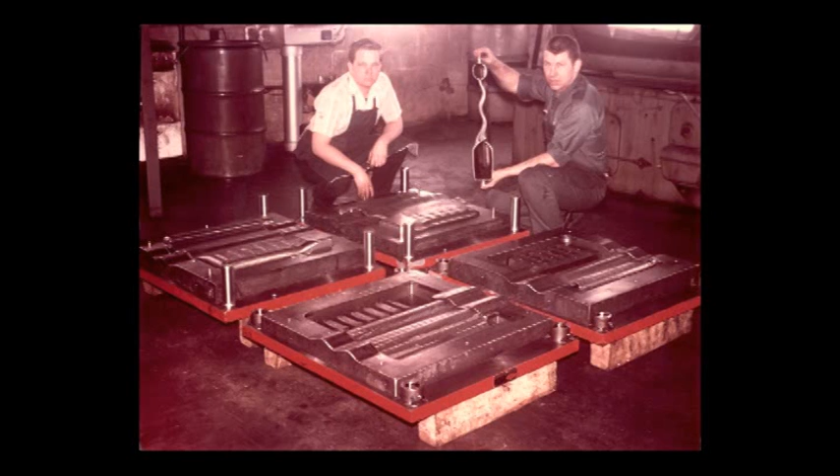The company began by serving area farmers with their machining needs and within 2 years had moved into building tools and dies for manufacturers of heaters, washers and dryers, and commercial staplers. The development of a motor grip feed would lay the foundation for today's product.

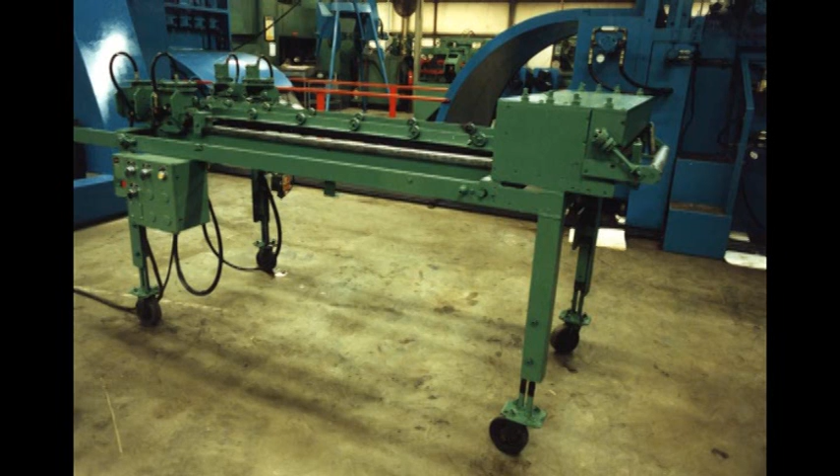In 1964, the company moved to a manufacturing space in the town of Red Bud. However, the company quickly outgrew that location, and plans were made to construct a new home for the company on the outskirts of town. In 1971, Red Bud Industries moved to its current location, at that time a 25,000 square foot facility. Around the same time, the Red Bud product offering expanded to machines for cut-to-length coil processing lines.

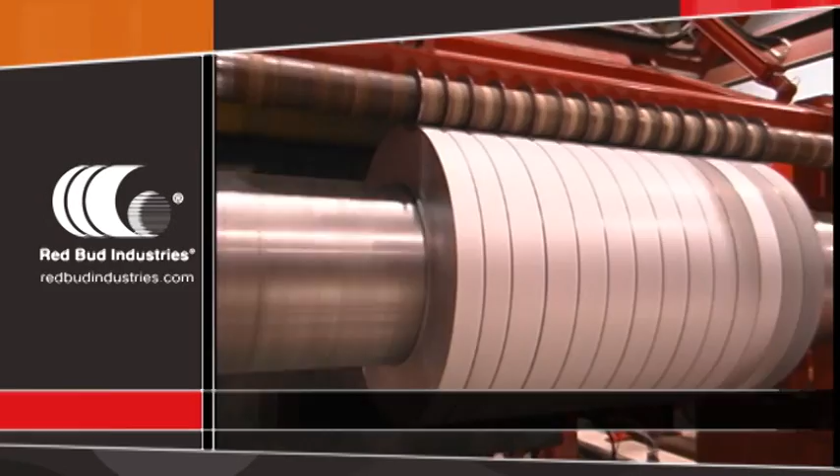The late 1980s and 1990s were a period marked by continual updates and improvements to the Red Bud product offering. The progress of design, research, and engineering continued into the new millennium. In 2000, Red Bud Industries designed and installed its first coil-to-coil slitting line.

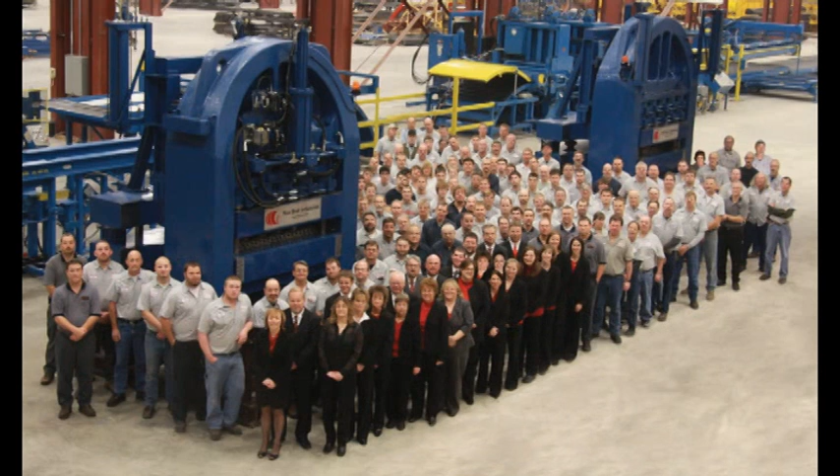The original 25,000 square foot building has been expanded 3 times since 1971 to meet the ever-growing number of orders. The building doubled in size in 1986 and again in 2000. The 2000 expansion was an office which hosts customers from around the globe. In the summer of 2008, the manufacturing facility was doubled once again to its current size of 200,000 square feet.

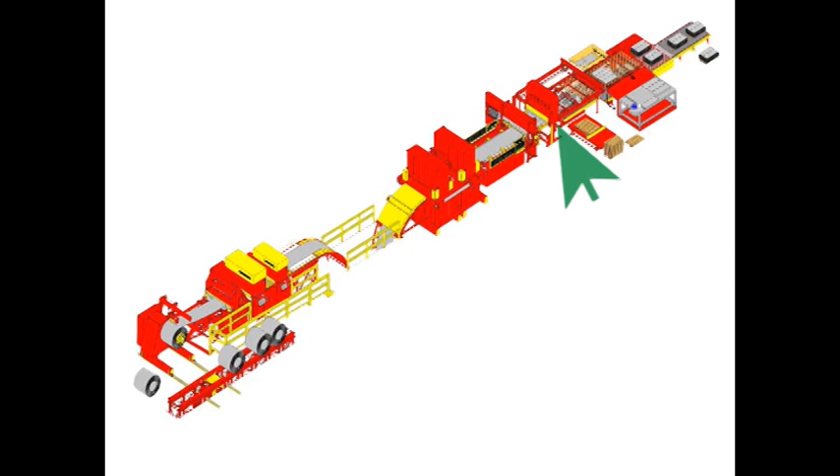The length of material is now fed through a shear and into a stacking device. The machine stops momentarily and the part is cut to the length that was set on the feed system. Here are the 4 panels cut to a given length and width. This particular installation has reject capabilities so that metal can be directed to a scrap bin or computerized measuring table without the operator ever touching the material. These lines measure up to 90 feet long, are 30 to 40 feet wide, and depending on the options, can cost the customer over $7 million.

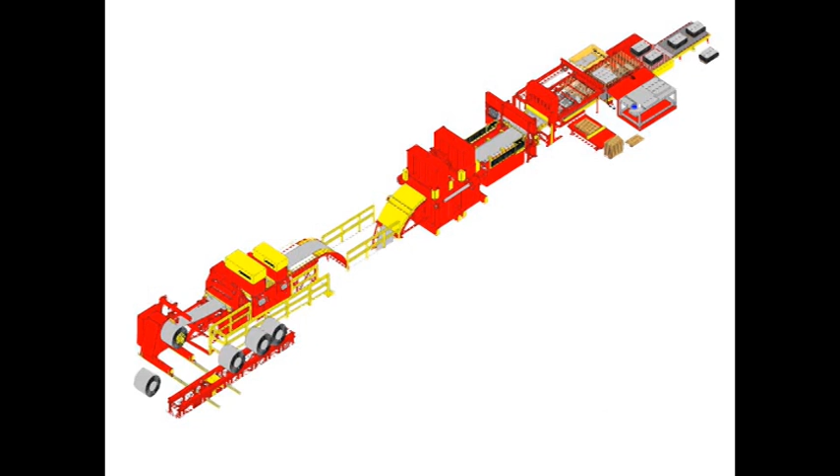This is a slitting line. It slits master coils to a desired width and runs at speeds of up to 2,000 feet per minute. These slit coils are used for other operations like stamping or roll forming. The staging and uncoiling areas are the same as a multi-cut blanking line. There is a choice of slitting heads in this area. One of them is a CNC slitter used in the multi-cut blanking line that we talked about earlier. The other is a packed head. You now see 4 strands that have been cut.

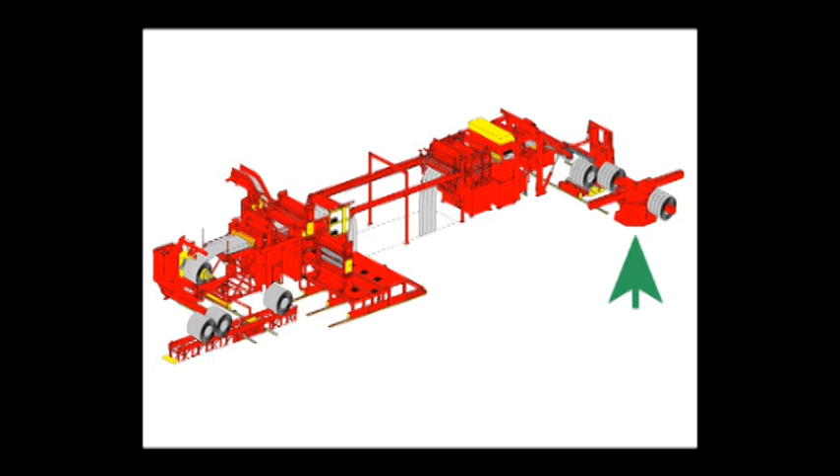This area includes tension stands that ensure the material is wound tight on the recoiling end of the line. The material is wound on a recoiler in this area, and then a coil car carries the material to a turnstile. The turnstile can either present the material to a packaging system or make it available to other material handling equipment.

Red Bud Industries boasts over 1,000 installations worldwide. Our equipment can be found in most U.S. states and many countries spanning 6 continents. Today, nearly half of all Red Bud equipment is purchased by international customers. Red Bud Industries performs all aspects of the product lifecycle, including design, manufacturing, sales, and service.

We have jobs in engineering, sales and marketing, electronic technicians, machining, welding, computer-aided drafting, administrative, and office. We also hire part-time people that work while they are going to high school and college. In one instance, an employee started working part-time while he was in high school and continued through college. He is now utilizing his manufacturing degree as a full-time employee.

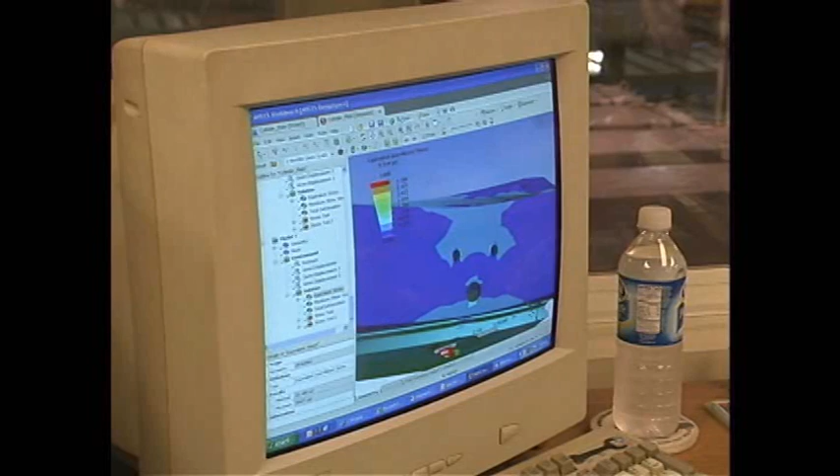We have electrical, mechanical, industrial, and manufacturing engineers. We design our own equipment, so our engineers must compete with the very best in the world. Since Red Bud Industries equipment is consistently ranked among the best in the world, it says a lot about our staff.

Because our product is sold worldwide, joining our sales team is a great opportunity to see the world. Our sales staff quickly learns of various customs in these countries and develops a product knowledge that is at the level of an engineer. They also perform a range of duties from producing sales videos to preparing advertisements.

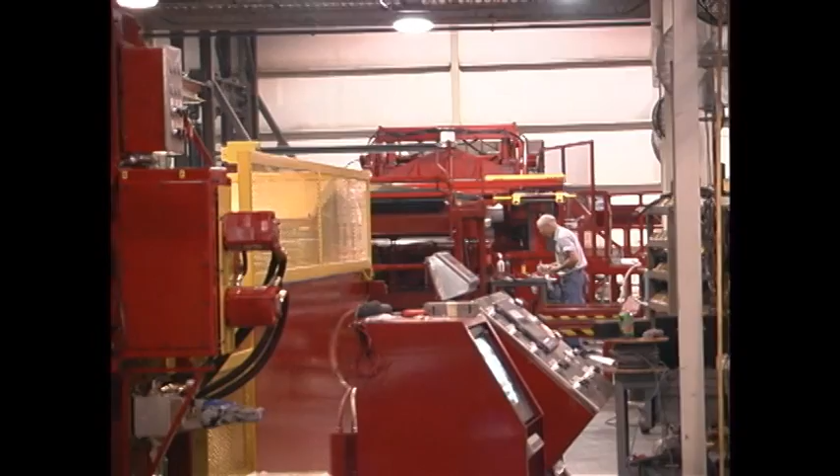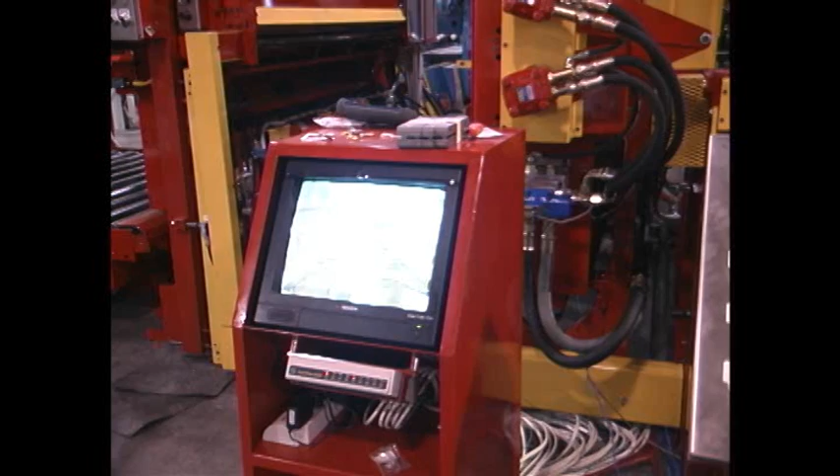Our service technicians install and service our equipment worldwide. This is another great opportunity to travel the world. Our equipment can be remotely accessed, so our service people can perform diagnostics and PLC programming on equipment across the globe without ever leaving our facility. Most of the technicians are employed by RBI Tech Support. A degree in electronics is needed.

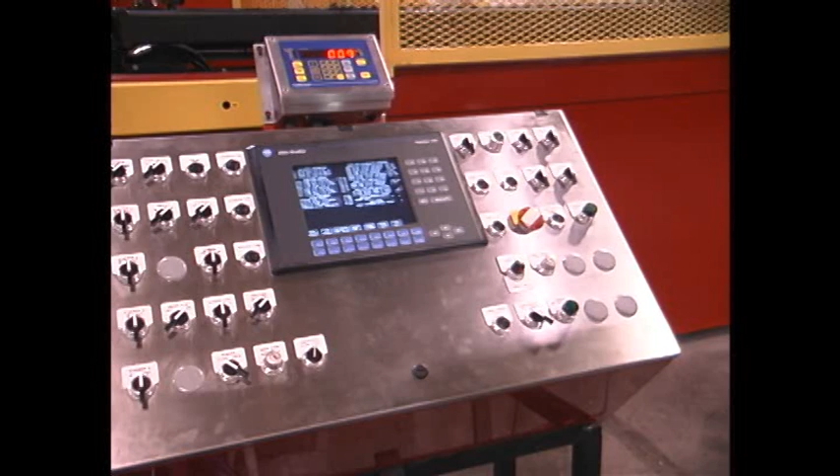Electricians wire the equipment on the initial assembly as well as in the field. When not traveling, the electricians also build equipment in our plant. This helps them stay familiar with the latest technology.

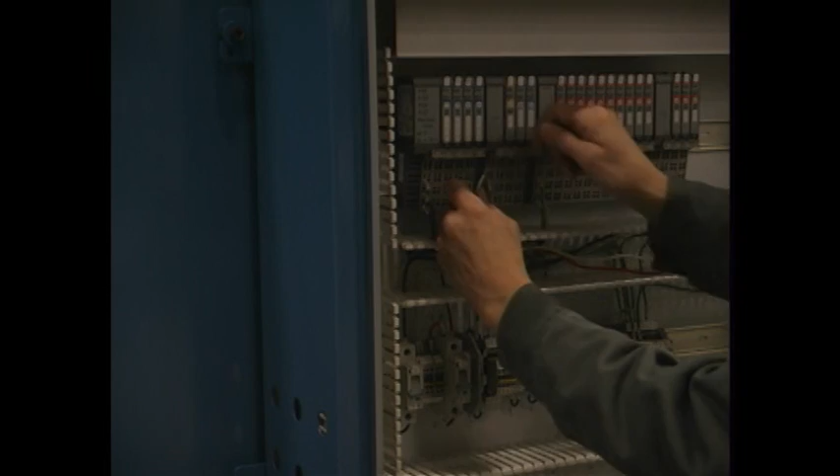Our machinists program, set up, and operate the latest state-of-the-art machinery. We have the machining capabilities that if we had a drawing for an engine part, we could machine that part with just as close a tolerance as the major automotive manufacturers do. We also machine parts that are much larger than an entire automobile.

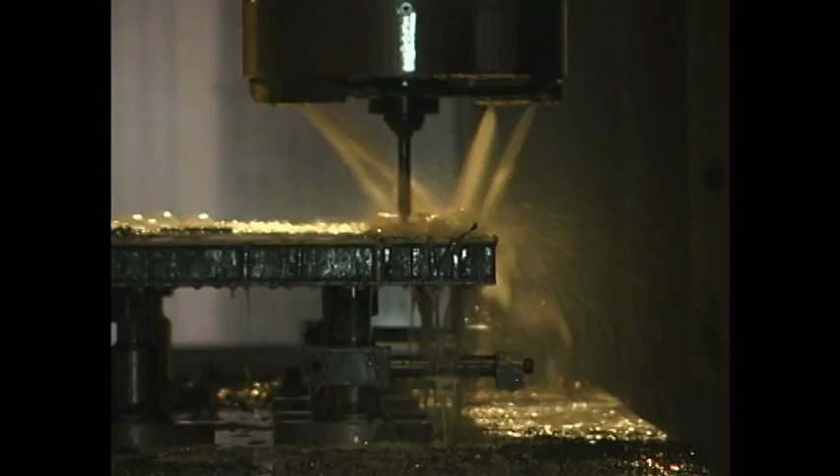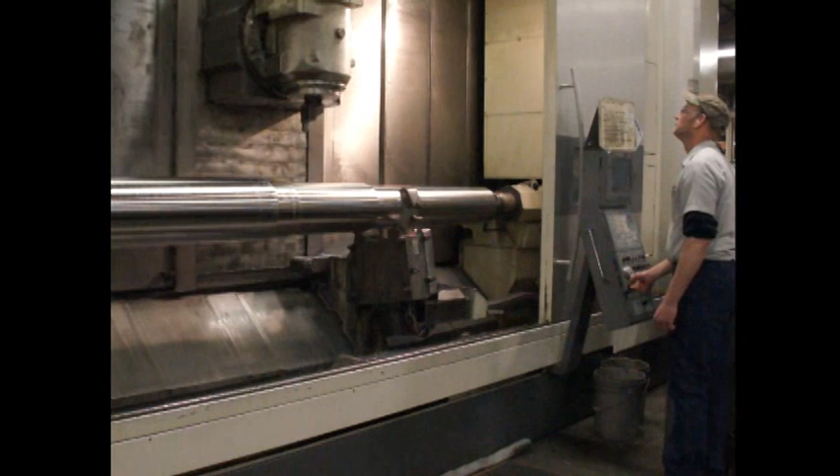Some of the equipment our machinists operate are 2 Mazak V80 vertical machining centers with interchangeable heads for horizontal work. This machine has a travel length of 157 inches and a travel width of 80 inches. A Mazak Integrex E650H mill and turning center with a multiple angle head. This machine can turn a part up to 42 inches in diameter and 162 inches long.

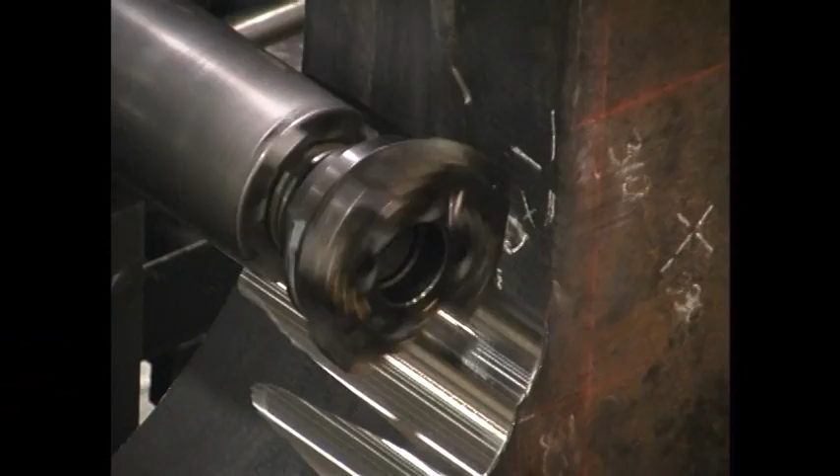Two G&L horizontal boring mills with CNC retrofit and multiple angle head. These machines have up to 30 feet horizontal, 14 feet vertical, and 6 feet Z-travel. These are used to machine 80,000 pound castings.

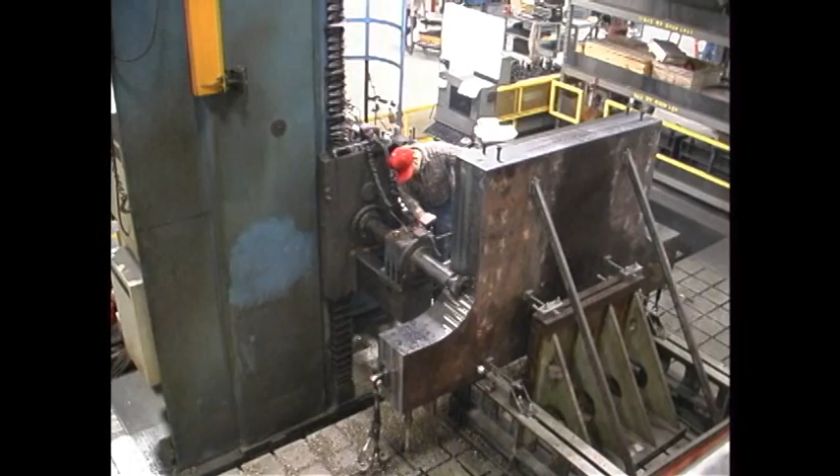We also have 3 new Mazak Horizontal Center Nexus 6800 II with probing capabilities to check parts and tools. These machines are connected to a pallet server system that enables us to pre-stage up to 48 pallets of multiple parts to be machined. This allows the machines to run unattended at night and on weekends.

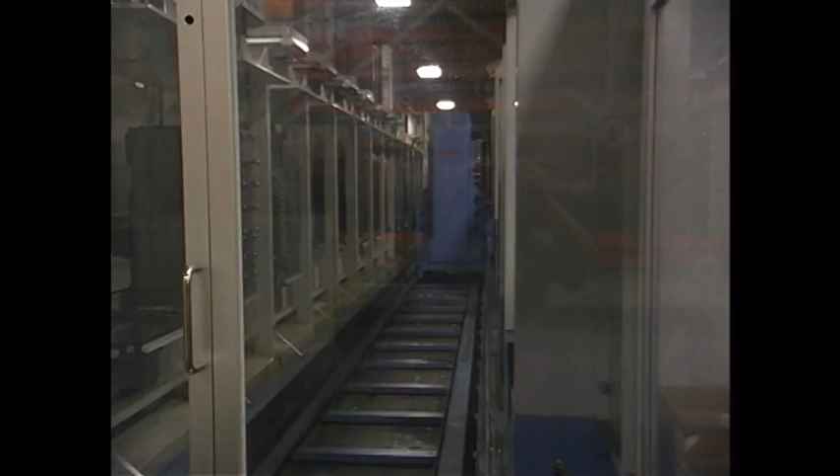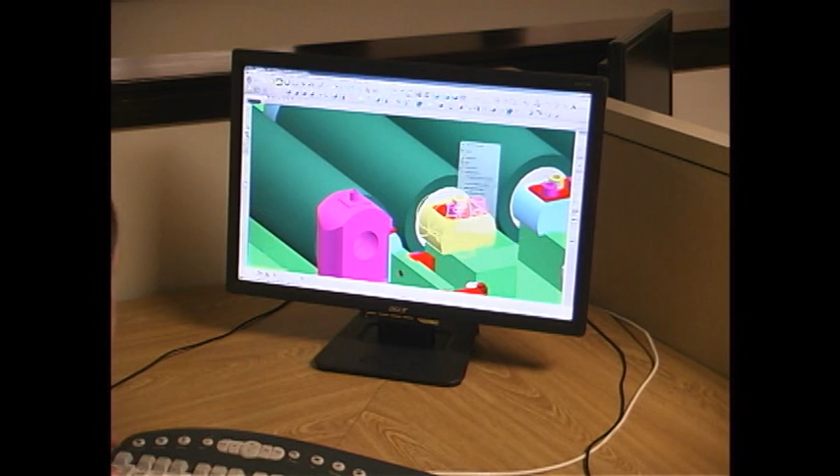Our welders must be able to weld large assemblies from drawings. Some of these assemblies will hold steel coils that weigh 80,000 pounds. We use a 3D solid modeling software called Unigraphics. This software is also used by GM, Boeing, and NASA. An associate's degree in CAD is very helpful in this department.

This category ranges from general clerical all the way through management positions. The wide array of jobs varies from word processing to all levels of the accounting process to computer science and programming to technical writer. We also have a designated travel agent, contract administrator, and insurance administrator. We have a great combination of people specializing in areas like accounting, finance, and computer science engineering.

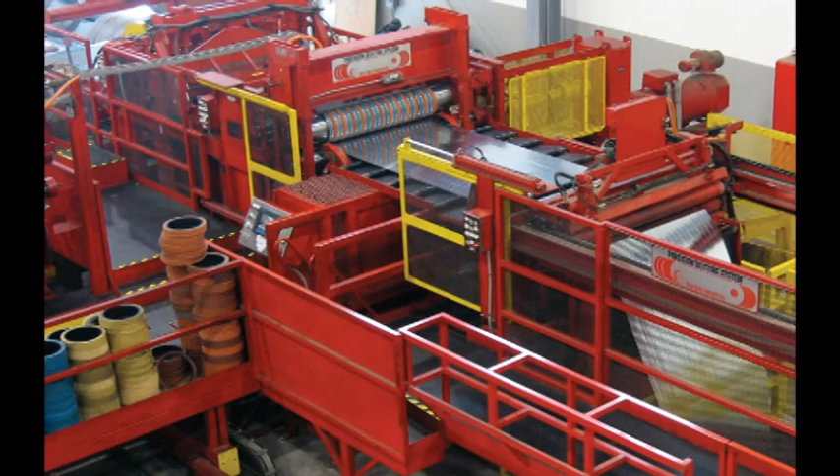You will notice that most of these jobs require extra training. It is said in the next decade, 90% of all jobs will require education beyond high school, which can potentially provide more than $1 million more in earnings over a lifetime. While many things have changed since the business started, the principles on which Ken Voges founded his company still hold true, with safety, good employment wages and benefits, and customer satisfaction as top priorities.

Red Bud Industries employees enjoy exceptional benefits: competitive wages, excellent health and dental benefits, disability benefits, flexible spending account, and 401k profit sharing with employee contributions, including a 5% annual contribution to all employees.